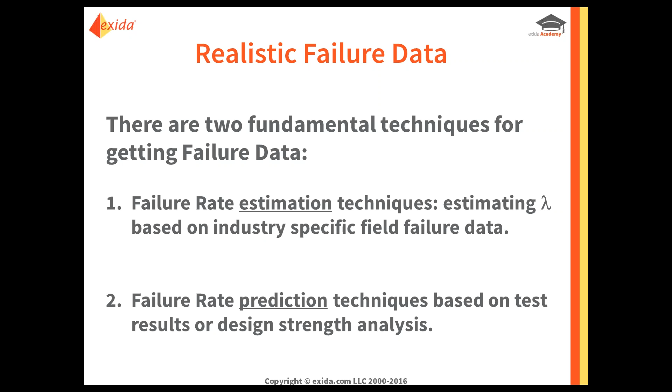So let's start by looking at the estimation technique or method. This method has three main ways of achieving estimated failure rates. You can have your manufacturer field return data studies, your industry databases, and your end user field failure data studies. And as most things in life have pros and cons, all the methods that we're going to talk about today do.

So let's first look at the manufacturer field return data study. This data is great because it is very useful in root cause analysis, and it's real data. It can be very useful. But there becomes a slight issue when you look at the overall failure rate calculation, as percent returns and actual operating hours are unknown. You also don't understand what each company could consider a failure.

Company A: oh, this is definitely a failure, it's going to count in my return analysis. But company B can look at it and say, it was customer misuse, I'm not going to count that, it wasn't my fault. So the definition of a failure could differ from company to company, and even the same company, site to site, could differ on their definition of what is a failure.

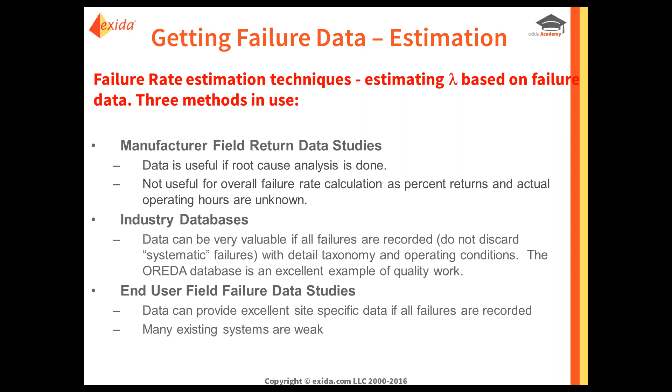Another method is the end user field failure data studies. Once again, the data can be excellent site-specific data if all failures are recorded. You have to have a system in place. You have to make sure that you're not disregarding some failures or how they were found. But many of the existing systems are weak, and many companies and even sites have different definitions of what a failure can be. So every method in the estimation technique for estimating failure rates has both positive and negative attributes.

The most successful failure rate estimation effort to date is the OREDA database, and they have been keeping track of offshore and onshore reliability data for many years. They just released in 2015 their 6th edition, and they collaborate with different offshore companies in the North Sea. And it provides high quality data on process equipment in generic categories.

So that is great to see all of your information, but it's also hard to know if your system matches exactly the boundaries of what they're considering a final element assembly. And you have to go through and really pick apart the information to make sure that yours is going to match. But this is a wonderful way to compare your failure rates to real failures that have been analyzed.

The second way to predict realistic failure rate data is the prediction method. So once again, the prediction method of predicting failure rates is based on test results or design strength analysis. The test results would be considered the B10 data points, and the design strength analysis would be an FMEDA. The B10 data points are based on cycle testing for mechanical or electromechanical products, and it is assumed that the application has constant dynamic operation, which is great for a machinery type application or something that has a continuous demand application.

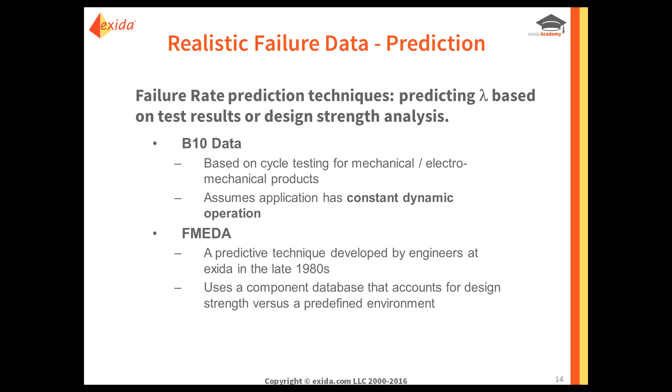So we're going to start with the B10 failure rate data. It is sometimes called the cycle test failure rate data, and it uses cycle test data, a testing technique developed to determine the end of life for mechanical or electromechanical devices. And this method for predicting failure rates during useful life is described in ISO 13849.

The thing you have to watch out for with cycle test data, or the B10 failure rate data, is it assumes that all failures are only due to premature wear out and that no other failure modes exist, which is fine for a continuous demand application.

Cycle testing is done on a set of products greater than 20 units until 10% of the units under the test fail. And that's where the 10 in B10 comes into play. The number of cycles until that failure is called the B10 point. The B10 number of cycles is converted to a time period knowing the cycles per hour in any particular application.

And we've done a lot of research on scaling of the B10 point and cycle testing. We've not found any guide, so to say, on how far you can scale, or even how scaling first came to be.

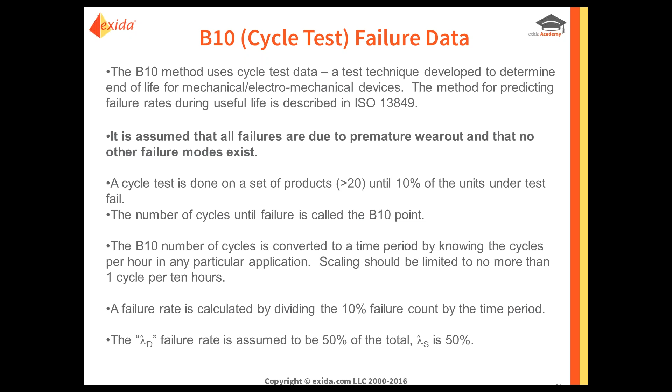So the main point to take away from the B10 failure rate data is that the method assumes that there is a constant failure rate during the useful life, and it is due entirely to premature wear out, and all other failure modes are completely insignificant. Nothing else can happen besides wear out. And as I said, research shows that other failure modes become significant when these products do not move frequently. And some failure modes become significant if the product is static or motionless for even just 10 hours.

And where does this become an issue? In which applications do we really care about this? Well, a main point is solenoids, valves, actuators. All of these have O-rings or other sealing parts, and many failure modes become significant when the product remains static or motionless for a week or more, some even starting at 10 hours.

These failure modes include stiction, cold welding, corrosion, binding, breaking down of the polymers, and most of these failures end up being dangerous. If you have an application where your valve needs to close if there is an issue and the valve is stuck open because of stiction or cold welding, and it cannot shut the process down in a safe or a predictable manner, you then have a dangerous failure that can occur and a major issue.

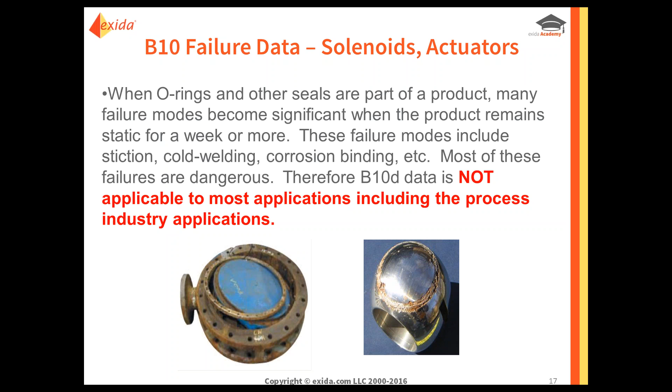The next method of calculating failure rates through prediction is the FMEDA, or Failure Mode Effect Diagnostic Analysis. You use a component failure rate database with failure rates. The failure modes for each component are chosen based on design and stress and strength. Given a component failure mode, a failure mode of a device is determined.

What we do is break down a bill of material and look at every single nut, bolt, O-ring, stem, anything that is in the product. We look at each component and figure out what are the chances of this breaking, how can it break, and if it breaks, will it be dangerous, safe, or no effect to the functional safety application?

From comparing all of the component failure rates and the failure modes and the distributions, we can then create a component failure mode, the ability of automatic diagnostics, and we are able to compile a whole product failure rate, a product failure mode, diagnostic coverage, and useful life can be predicted based on the useful life of the components. The diagnostic coverage can be calculated from all of the automatic diagnostics, along with proof test coverage.

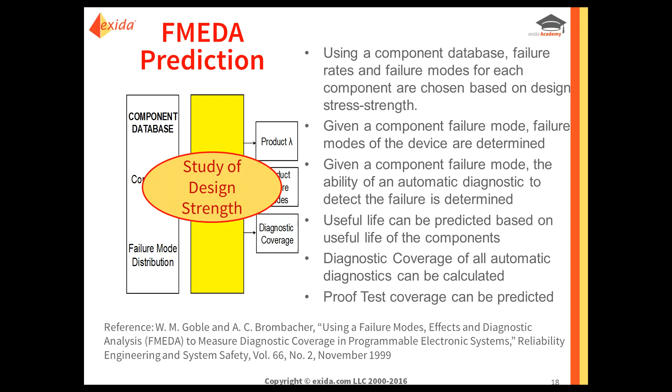And the FMEDA prediction technique is the study of design strength. As you can see at the bottom, how everything is done in the FMEDA prediction technique is covered in this book and white paper referenced at the bottom. Once again, I said there's pros and cons to each method. One thing that you have to look out for when you're looking at FMEDA accuracy is the component database. The accuracy of the FMEDA methods entirely depends on the accuracy of the component database.

The component database must include failure rates and failure mode distributions of each component as a function of one or more industrial operating profiles. You might have a valve that's going to be always in a clean condition. It's never going to be in a harsh or dirty environment. It's not going to be subsea or offshore. So you need to take into consideration all of those attributes.

If you have that same valve that's going to be offshore or subsea, you're going to have to consider different applications and different failure rates. Or what if you have a very dirty or corrosive environment that will be traveling through the valve? You need to be able to look at the different operating profiles and have different failure rates for the different operating profiles that your component might see.

As my mom always told me, garbage in is garbage out. So if you have a bad component database and use that in the FMEDA, it doesn't matter if you do everything in the FMEDA correct and accurate. If you are feeding in component failure rates that are too low or non-realistic or overly optimistic or just a guess, all of your calculations are going to be incorrect. So no matter how good of a process you might have, if you put in a junk component database, you're going to receive junk calculations and junk numbers.

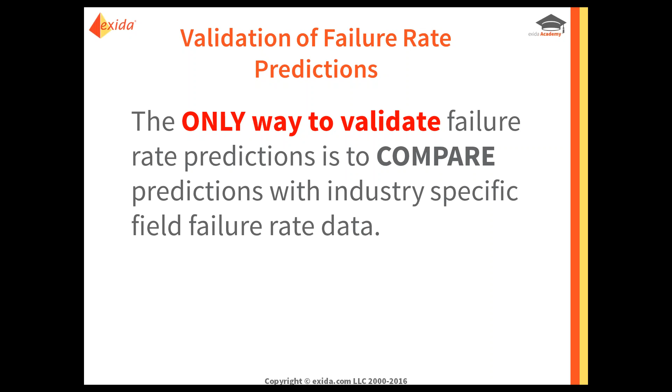You always want to do a double check when you're dealing with functional safety. You don't want to have the accident. You don't want to have the major misstep because you were overly optimistic or you used failure rates that you trusted but then found that they are not realistic, or the garbage in, garbage out failure rates. Therefore, when you receive a FMEA or you do a FMEA, you have to look at the component database, and they must be based on and calibrated by field failure data specific to the target industry.

And this is just the process that we go through for our component databases and the FMEA analysis. So we start and look at the detailed design information: what components are used, what stress factors are being applied to the product application and environment, and we break it down into a FMEA analysis. From the FMEA analysis, we receive the FMEA results. We have the safe detected, safe undetected, dangerous undetected, external leaks, no effects, all sorts of failure rates, and their failure modes along with useful life.

We take the results and the failure rates, and we compare them to product level failure rates, or failure rates per mode. And we look at that through the component failure rate database. At the same time this loop is going on, there's a second loop. The field failure data is used to compare the FMEA results, but it also is used to calibrate the component database, which, as I said, we like to be an open book. We make sure that it is a public database.

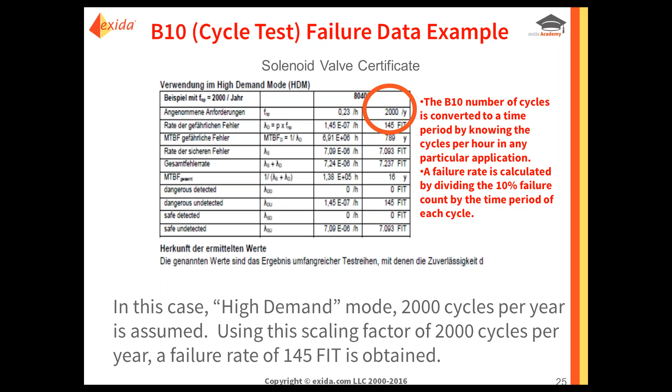So using this as a scaling factor, they say that 2,000 cycles per year has a failure rate of 145 failures in time, or FIT, obtained. Okay. So you go to the bottom of the certificate and it's the same valve, and you can see it deems it a low demand mode of operation, and all of a sudden there's 1 cycle per year being a low demand, and the failure rate is 0.07 FIT.

Well, if you go through and do some math, you can see that 145 FITs divided by the 2,000 cycles per year is 0.0725. And they want 1 cycle per year instead of 2,000. So now the failure rate is scaled.

And this is pretty much the exact opposite of what you should do with realistic failure rates, because low demand mode includes stiction, cold welding, the polymers break apart, there could be corrosion, there could be binding. All of these modes occur in a low demand mode operation that will significantly increase the dangerous failure rates in low demand mode application. In high demand mode application, all you're going to see is wear out. In low demand mode application, there are so many other things that come into play. So it should be the opposite.

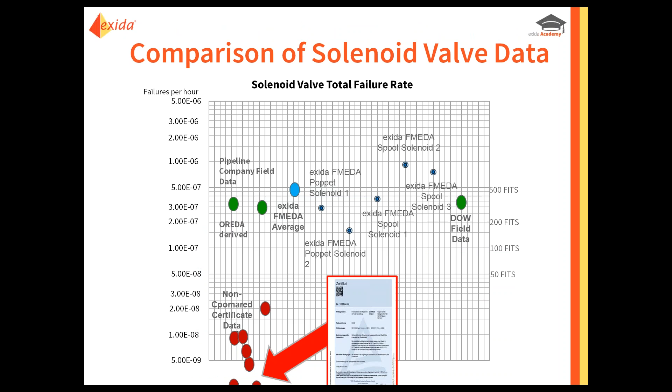And as you can see, this one example is right down at the bottom. That's the certificate that we just looked at in detail for a solenoid valve. And here's another solenoid certificate. Some certification reports distributed by different manufacturers include failure rate data that is extremely low. And they say they use the FMEA method, so you have to kind of take a look. And the details of the FMEA method used and the component failure rates used are not available. Always make sure whatever information you use is published.

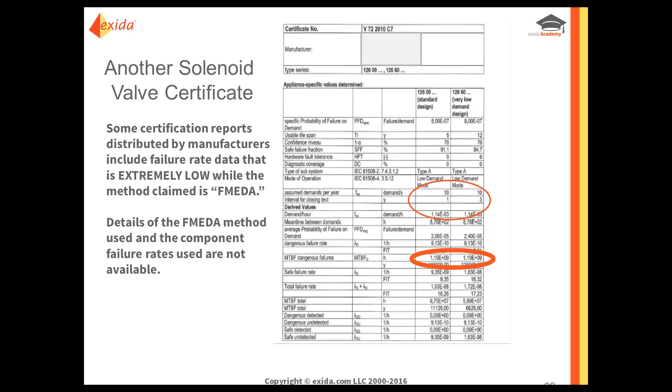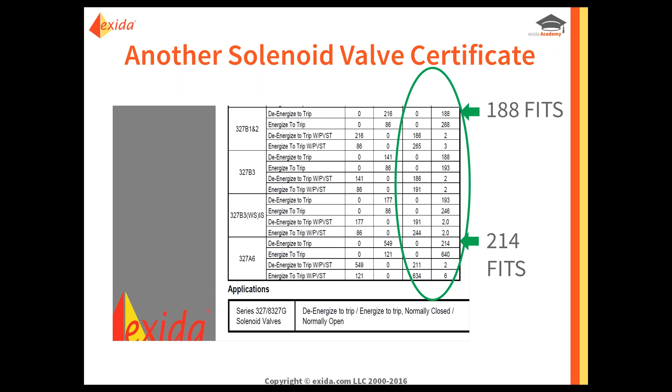So here's another solenoid valve certificate. You can see that this solenoid is broken down into different applications. You have de-energized to trip and energized to trip, with partial valve stroke testing and without, for the different variations of the solenoid valve. And it says that you can have de-energized to trip, energized to trip, normally closed, normally open applications for this series of valves. And it receives multiple different failure rates of dangerous undetected. We're going to take a look at the 188 FITs and the 214 FITs here. And that's where this solenoid comes into play.

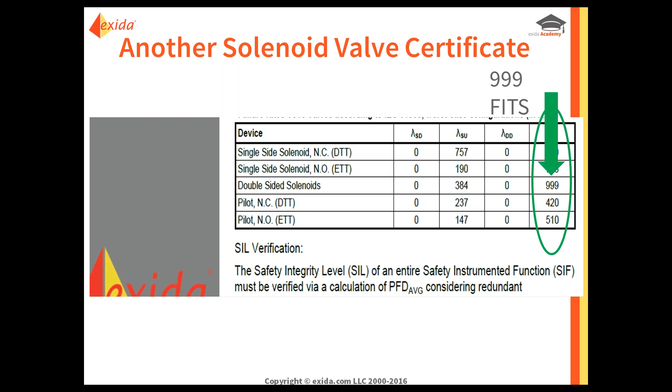Another solenoid certificate, you can take a look at, once again, de-energized to trip, energized to trip. You have a single side solenoid, a double side solenoid, and pilot solenoids, normally closed and normally open. And we're going to take a look at the 999 FITs, which is higher than most solenoids would be, but it is a double-sided solenoid, so you need to take that into consideration. And here is that number.

So after looking at all of the examples, you might be asking, well, why are there differences? Well, there could be many different explanations. There could be different techniques and different assumptions used in the analysis, like is the assumption made that the device is constantly moving or dynamic? Is the assumption made that the site has absolutely 100% perfect maintenance, that everybody does everything perfectly all the time and on time? It is very hard, if not impossible, to tell from the certificates and sometimes even from the reports what different methods and assumptions were used.

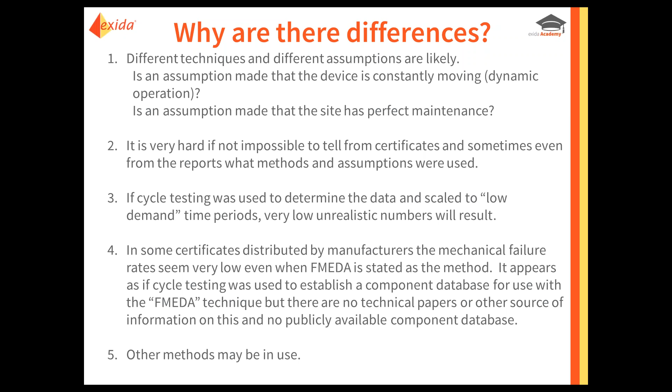There could be differences if cycle testing was used to determine the data and scaled from a high demand application down to a low demand time period, and you could receive very low or unrealistic numbers. Some certificates distributed by manufacturers have mechanical failure rates that seem very low, even when it states an FMEA was used. It appears that cycle testing was used to establish the component database used with the FMEA technique, but no technical papers are presented on it; the source of the information is hidden, it's not made publicly available. That's one thing that you have to look out for, or other methods could be used for the failure rates.

So what do we always suggest? Check the failure rate data validity. If you look at a certificate, it's very hard, even for us, if not impossible, to tell if cycle testing was used to determine the data. In some cases, it even says a FMEA was used, yet the results are very similar to cycle testing. And what we've uncovered is it appears that cycle testing was used to establish the component database for use in a FMEA technique type of method.

You should look at the manufacturer's self-analysis of warranty data and make sure that it appears to have been used by some certification agencies. They just accept the manufacturer's warranty data and make that the failure rate, but as we talked about, the manufacturers might not consider different things failures from company to company, or even what a failure is. You don't know how many are actually returned. If it is a low-cost part compared to the entire system, it might just be easier to not return it, buy a new one, and put it in. So you don't even know how many are actually returned. Or other methods could be used.

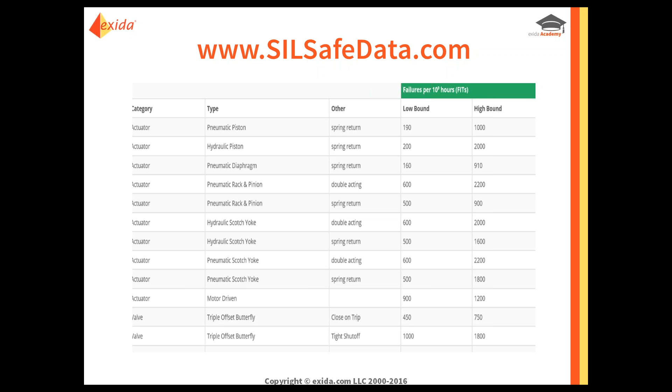You can go to this website and take a look at what the lower bound or the higher bound should actually be. And as you can see, there's where the SILSafe Data limit for a poppet 3-2 solenoid valve in a low demand mode application is. It says it cannot be below this line; maybe it's a continuous demand application, so great, you can use the very low numbers. But if it is not continuous demand mode operation, you need to make sure you're above that line when you're doing calculations, to be realistic and to not under-design your system, which could be disastrous.

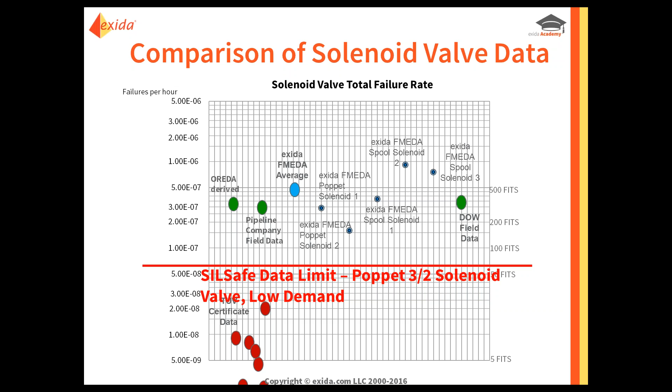And any FMEDA failure rate prediction method must have a publicly available, complete, published component database, and a technical explanation on how the component database was created and applicable operating profiles. And once again, there are some examples that you can look into if you want.

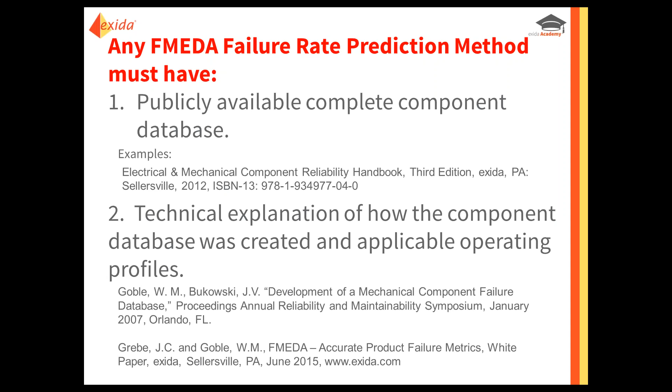So right now we're going to go ahead and see if anybody has any questions. And we have a couple. Let's see here.

This question is, field failure data from end users may not be available at the time of SIL verification. Can we use the manufacturer's SIL data for SIL verification? You can. I would use the SILSafe Data website as a sanity check. If there is field failure data from end users, you can use it. You can also use the exida database. There's many different ways to double check your calculation and your failure rates. So I would consider doing anything that you can get your hands on.

Is the SILSafe Data the same as exida? It is not the same. They are very complementary of each other. It is produced by two separate entities, but all of the research we've done shows that the exida numbers fall within the SILSafe Data numbers if you look at the exida numbers correctly. When comparing your systems to an exida system, you have to be considerate that exida doesn't look at a valve or an actuator. It looks at an entire final assembly unit.